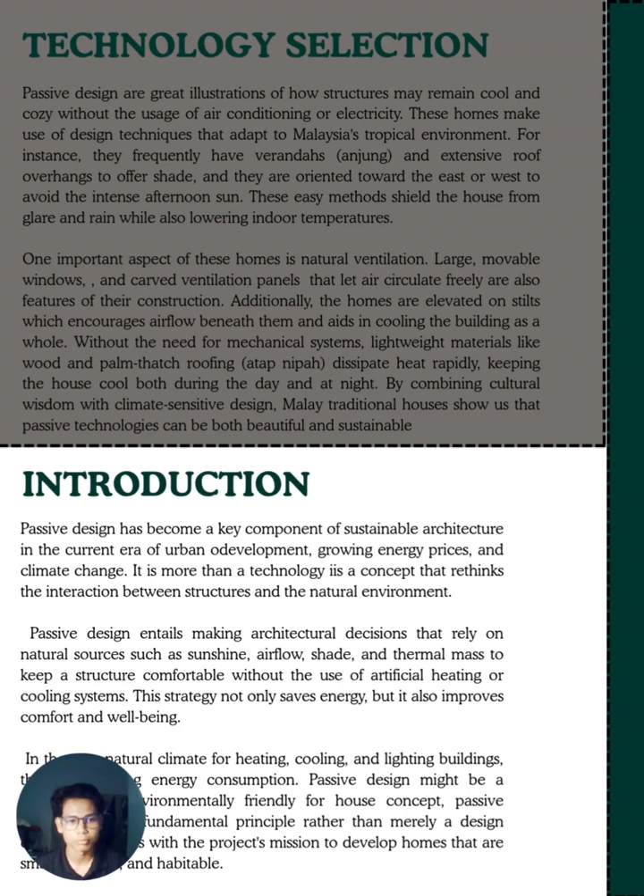In this literature review, according to Elaouzy and El Fadar 2022, passive design reduces energy use, carbon emissions, and cost by using climate-responsive features like natural light, airflow, and orientation. When properly applied, it really improves energy efficiency. However, it's still underused and needs wider promotion among architects and decision makers.

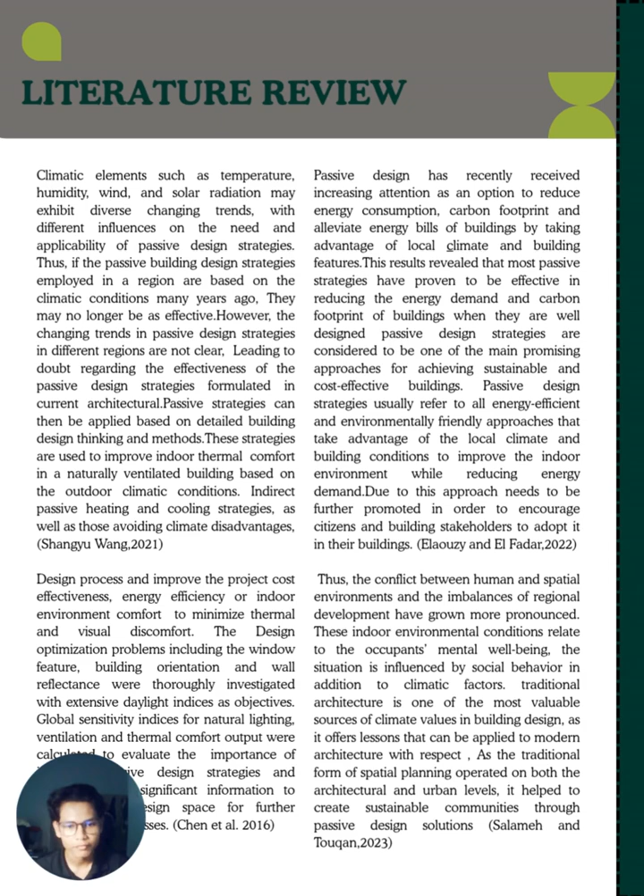Social and environmental challenges also impact building comfort and well-being. Traditional architecture offers valuable passive design lessons suited to the local climate. To stay relevant, passive design must adapt to current conditions using updated methods. Key factors like window size, orientation, comfort, and energy use help designers focus on the most effective strategy.

The main purpose of passive design is to increase comfort, reduce energy bills, and lower carbon emissions. It supports sustainable development by using climate-responsive design. Important features include building layout, natural ventilation, shading devices, thermal mass, materials, and lighting devices. It's all about working with nature and not against it.

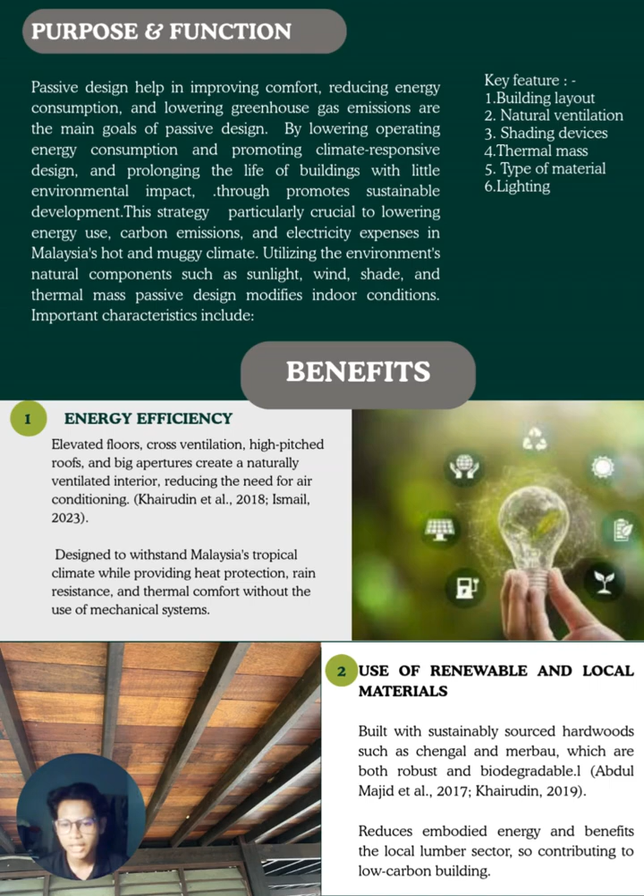The first benefit we can get from passive design is energy efficiency. Elevated floors and cross-ventilation create a naturally ventilated interior, reducing the need for air conditioning, designed to withstand Malaysia's tropical climate while providing heat protection. Second, use of renewable and local materials. Built with sustainably sourced hardwood such as chengal and merbau, which are both robust and biodegradable. This reduces embodied energy and benefits the local timber sector, contributing to low carbon building.

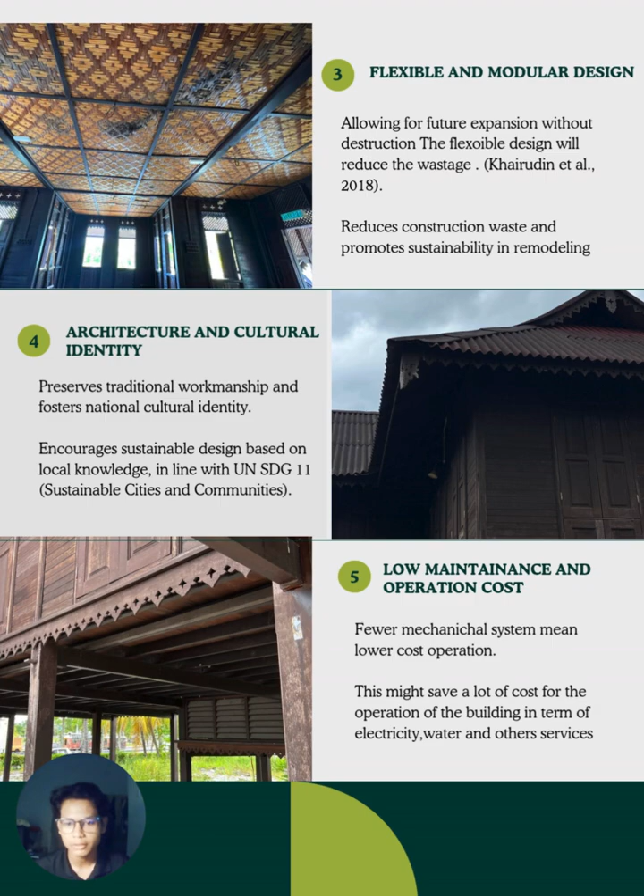Third, flexible and modular design, allowing future expansion. It also reduces construction waste and promotes sustainability in remodeling. Fourth, architecture and cultural identity. It preserves traditional workmanship and fosters national cultural identity. Fifth, low maintenance and operation costs. Fewer mechanical systems mean lower operating costs. This might save a lot of costs for the operation of the building in terms of electricity, water, and other services.

Of course, there are challenges too. First, climate dependency. Rain and humidity can damage material. The solution? Use eco-friendly termite protection and treated wood. Second, high price and limited availability of traditional material. Traditional hardwood is very expensive, and we can use recycled wood or bamboo.

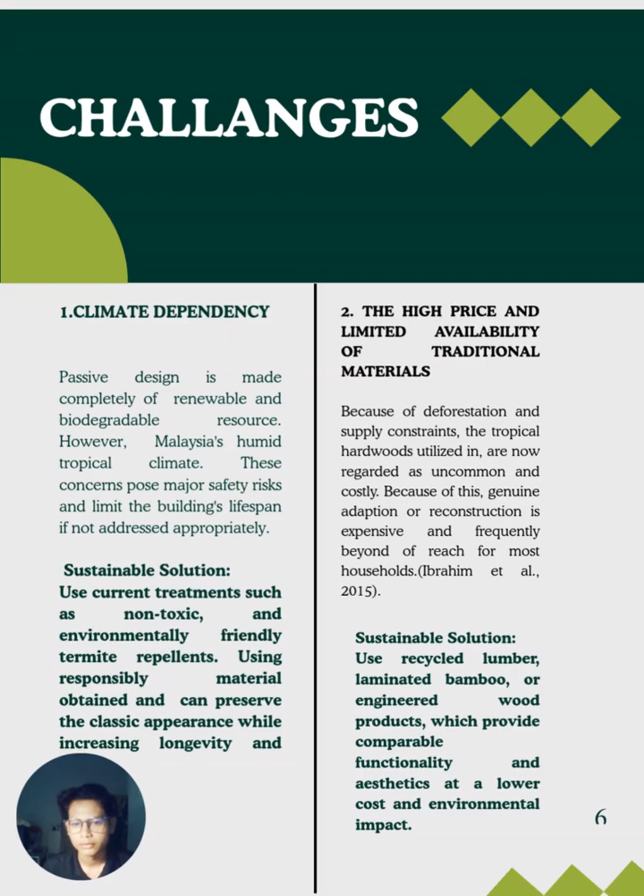Third, lack of skilled craftsmen. Fewer young people are learning traditional methods. Solution: offer training and mix traditional and modern techniques. Fourth is building regulation. Some rules don't support passive homes. Solution: we can work with local authorities to update the policy so passive design can be implemented.

Five, higher initial costs, especially in cities where land is expensive. We can use vertical and modular design. Six, low public awareness. Not many people know the benefits, so we can create campaigns, education, and modern design showcases.

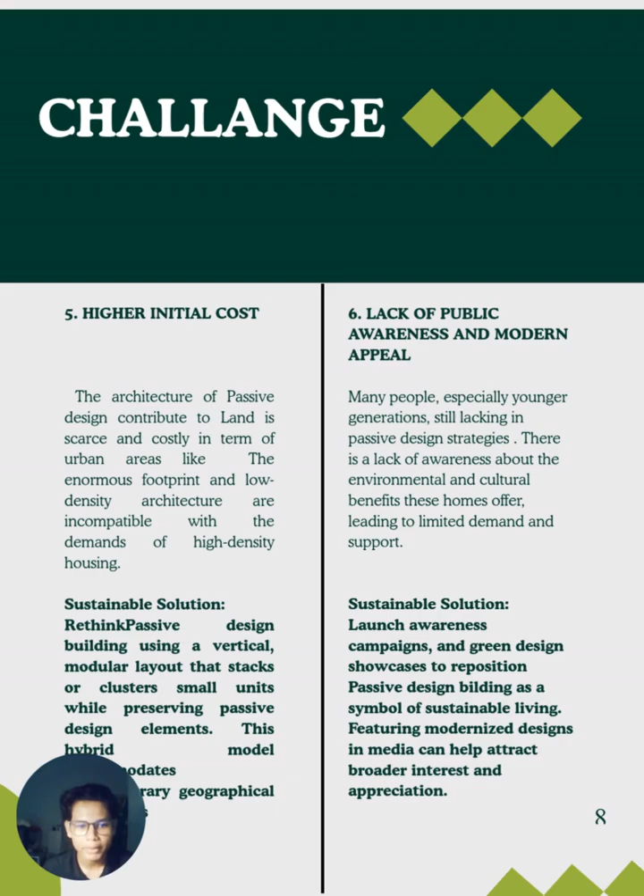Let's go through my case study. The case study that I chose is the Rumah Kutai replica in Bandar Meru Raya, Ipoh. The location is at Meru Raya, Ipoh. It's developed by Perak Corporation Berhad, PCB developer. And the Kutai House reflects the cultural society and community also.

The house provides sustainable elements which are tangible, combining passive design with contemporary sustainable construction goals. However, full effort is required to fully realize their potential as long-lasting resources in sustainable urban development. Rumah Kutai is Malaysia's traditional house and the role model of the Malaysian traditional house identity.

In this case study, I've explored a lot of knowledge from the management of Perak Corporation Berhad (PCB). The interviewee was Encik Nazmi bin Abdul Rashid, who helped me by providing information about this building.

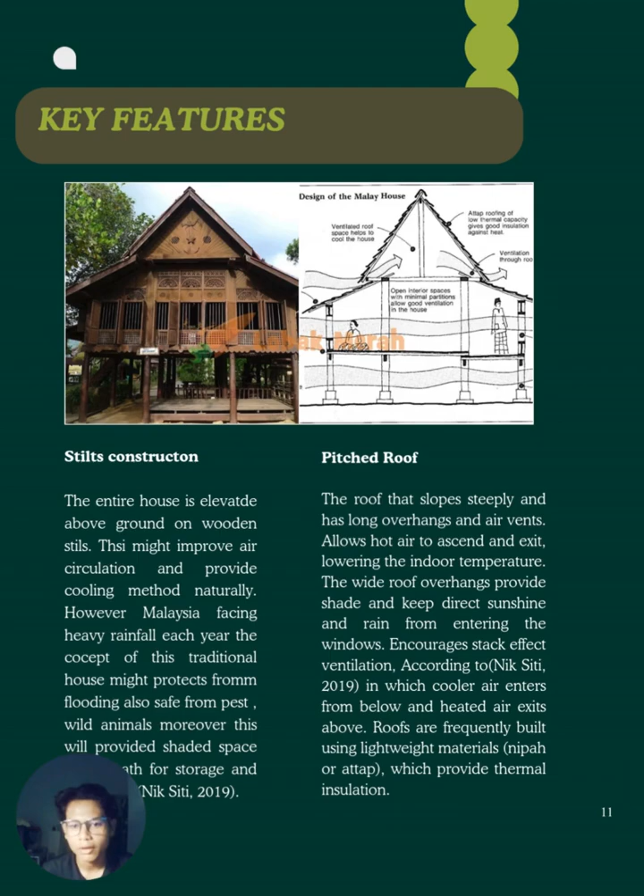The first key feature in the Rumah Kutai is the stilt construction. As you can see, the entire house is elevated above ground on wooden stilts. This improves air circulation and also protects from flooding and wild animals. Second, it uses a pitched roof that slopes steeply and has long overhangs and air vents. It allows hot air to ascend, easily lowering the indoor temperature.

This house includes large operable windows with ventilated panels. These adjustable louvers provide more control over light and ventilation, decreasing the heat, and their position balances airflow and properly disperses light around the home.

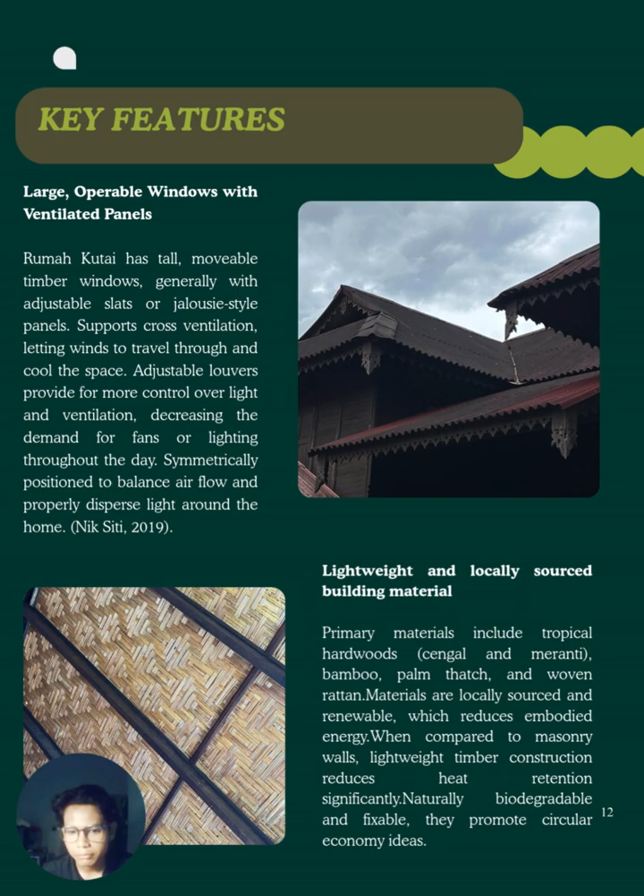It is lightweight and locally sourced. Primary materials include tropical hardwood, cengal, meranti, bamboo, palm thatch, and woven rattan. These are natural, biodegradable, and fixable, and they promote circular economy ideas. This house includes a veranda, the serambi, which offers a semi-outdoor living area. The veranda serves as a heat buffer, sheltering the house and creating a semi-open social space.

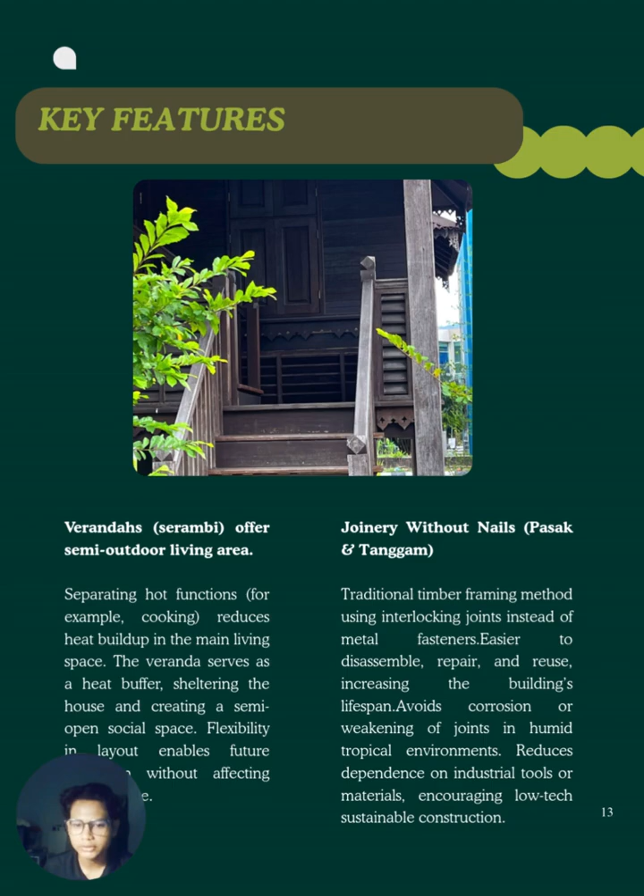Next is joinery without nails. This house uses pasak tanggam, which reduces dependence on industrial tools or materials and encourages low-tech sustainable construction. This house supports the UN Sustainable Development Goals. First is SDG 11, Sustainable Cities, promoting cultural identity and inclusive architecture. Second, SDG 13, Climate Action, showing how to manage passive cooling for a tropical climate. And SDG 12 promotes the use of sustainable resources.

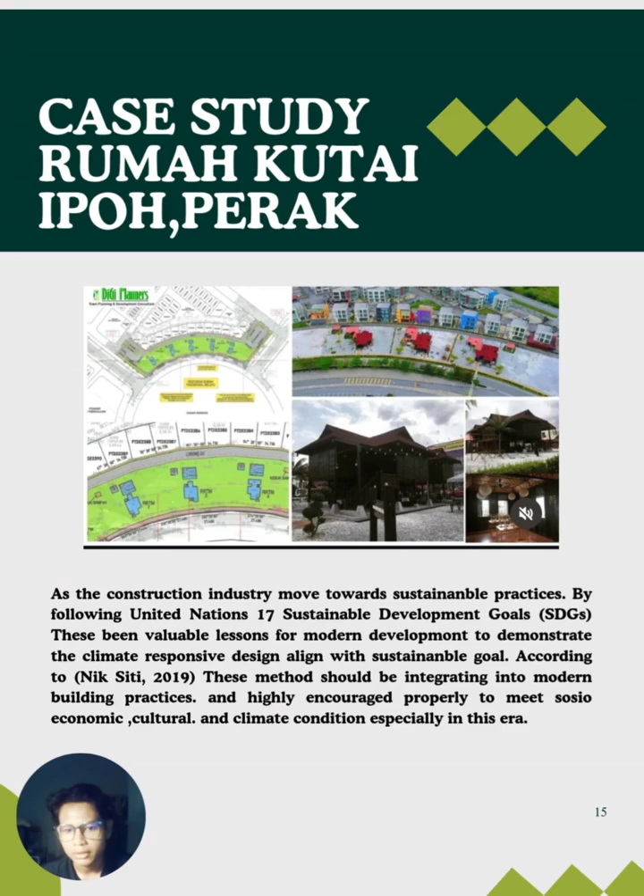As the construction industry moves towards sustainable practice by following the United Nations 17 goals, this method should be integrated into modern building practice and highly encouraged to meet socio-economic, cultural, and climate conditions, especially in this era.

The recommendations for passive design are: first, for builders and contractors, we can use raised floors, natural materials and overhangs. Second, for design consultants and architects, we use software to simulate airflow and daylight. Third, for policy and regulation, we can update building codes and offer green incentives. Fourth, developers should choose designs that save energy and support local culture.

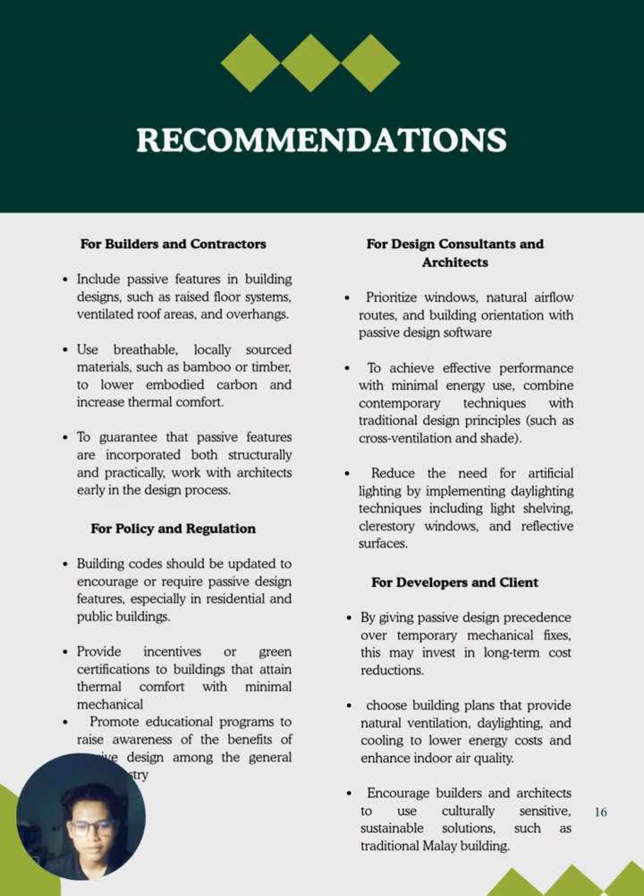In conclusion, the traditional Malay house shows us that passive design is not just about the past, it's a smart solution for the future. These homes are naturally suited for our tropical climate and offer low-energy, sustainable comfort. By learning from their design, we can create modern buildings that use less energy, reduce carbon emissions, and promote a healthier, greener lifestyle. Adopting passive design is a step forward in building smarter and more sustainable homes.